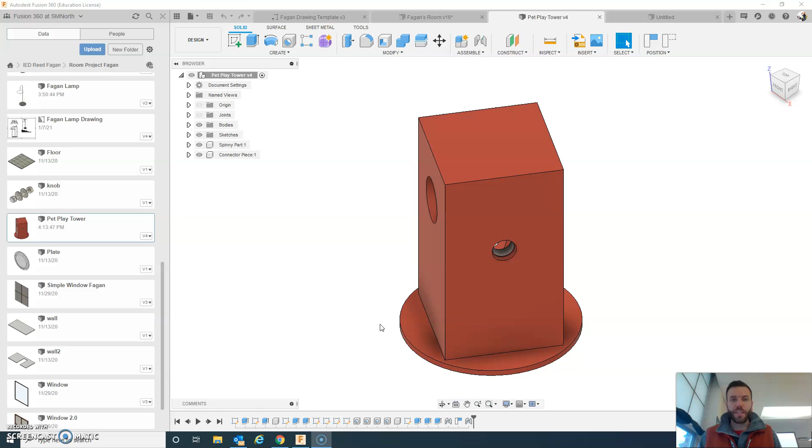Alright, I'm really excited about this assignment for the room project, because in the end you're going to create something like this, a pet play tower. Think of those things they make for cats where they can jump into them, except you're going to choose your pet, right? So it could be a ferret, a cat, a bird, it could be a wolverine. I don't know what lives in your house or what you want to live in your house.

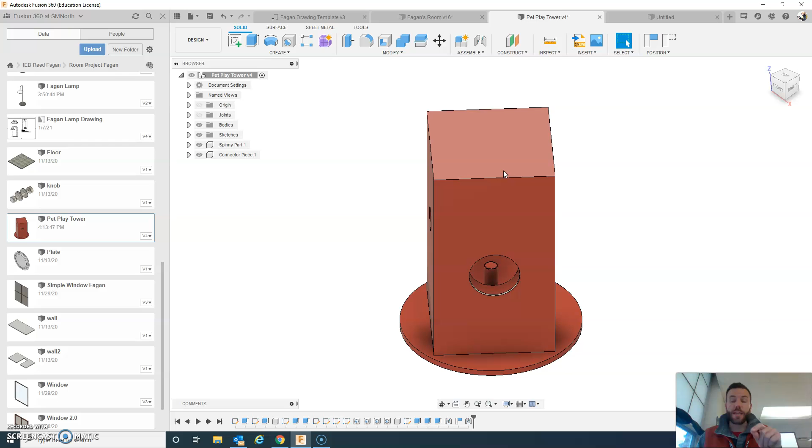But you're going to do something additional. You're going to make some design safety choices. Whatever you choose as your pet, you're going to design your pet play tower to be specific for that animal. So you need to make sure the holes are big enough, maybe. Maybe you're worried it's going to tip over, so you make a change to make the material heavier so it doesn't tip over when the animal jumps in. Also, the inside right now, you'll see the design I'm going to show you has this kind of spike. What could you do about that?

So there's different things you can choose from. You're going to have to make at least one decision and change to make it more safe for your animal. So let's get into this here.

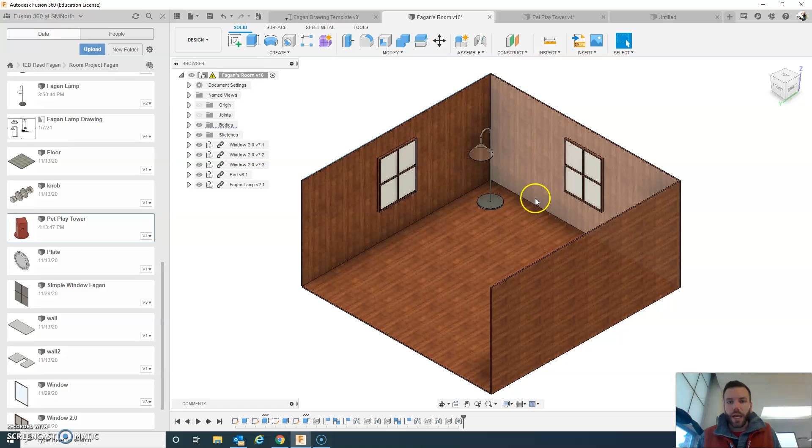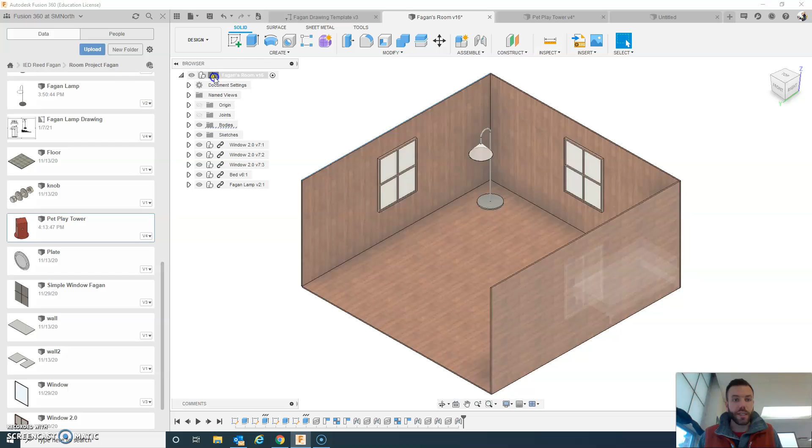One thing I want to show while I'm at it is you should be paying attention to this part of your screen in Fusion, because if you make changes to files that are inside a file, components that are inside a larger component or assembly, occasionally you'll get this indicator and you'll see something like this. What you'll need to do is sometimes you can just click on it and it'll update. Other times you should just close it and then reopen it and it'll reflect those changes.

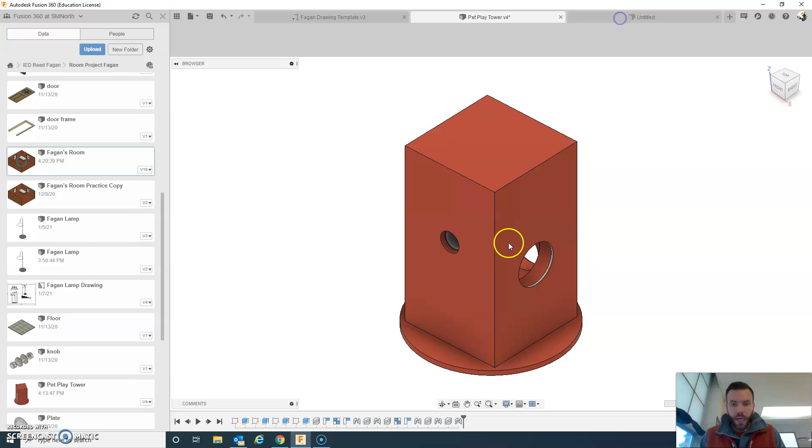So let's get into the nitty gritty here of how we're going to make this pet play tower. I was hoping that would open. There we go. But there are three components for it.

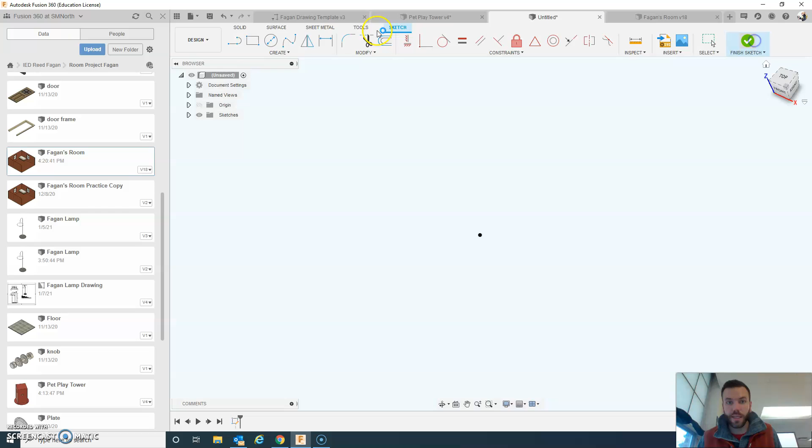So the first thing you'll want to do is create a cylinder for the base. This is, I think, 30 inches across. And finishing the sketch, we're going to extrude this to be 1 inch up.

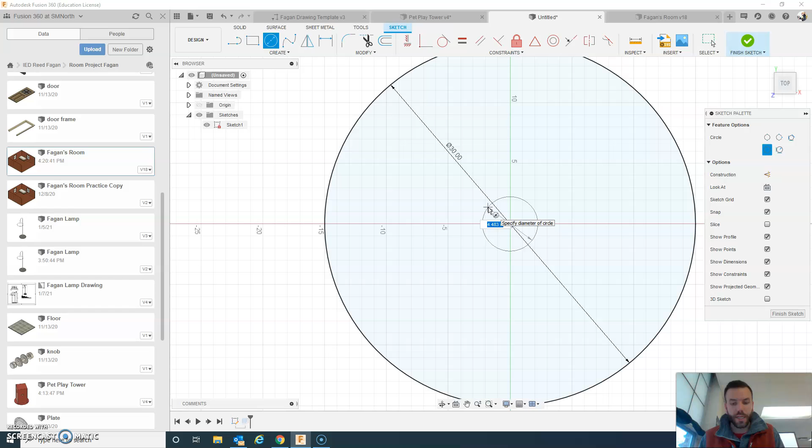So then from there, I'm going to go back and edit this sketch. I'm going to add a center point for it to spin on, to allow the thing to spin on it. So I'll finish the sketch. What I can do is turn the visibility on, go underneath, and we're going to extrude this up a distance of 12 inches.

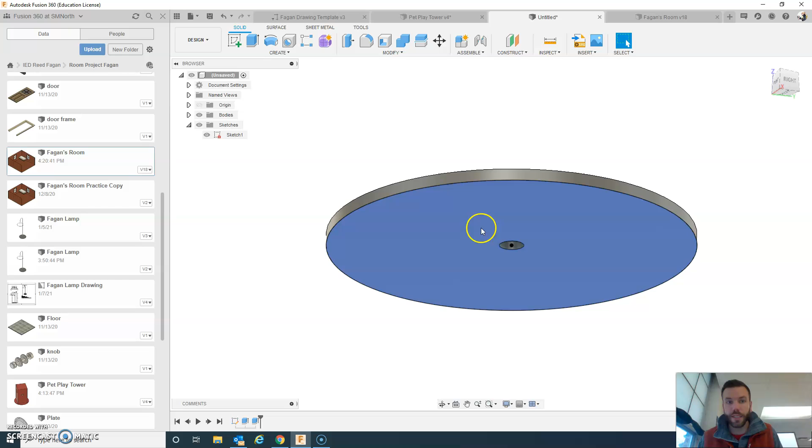Oh, it did an extrude cut, so we'll just fix that. Right click, edit feature, change that cut to join. And so we got that part.

And we're going to save this thing and call it Fagan, so your last name, pet play tower or structure. So for now, that's what you're going to do. I've already got one, so I'm not going to do that right now.

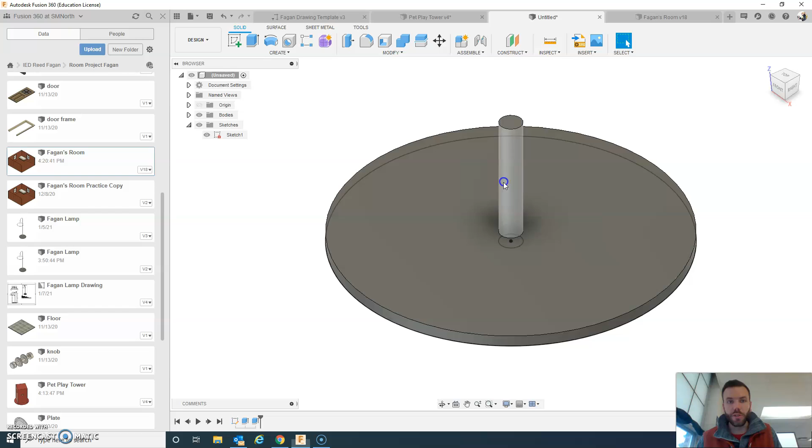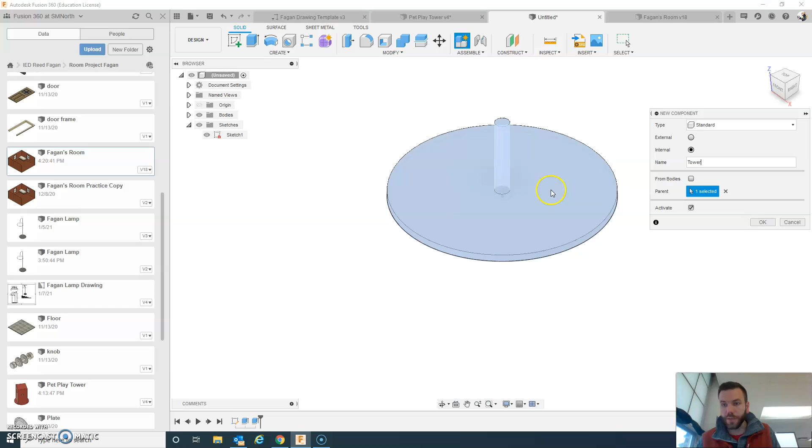But then you'll need to make another component. New component, and we want this to be internal. It's standard. The name of this will be the tower itself. And from bodies, we can leave that alone. We want it from this parent, and we're going to say activate as soon as we go. So click OK, that means it's activated. This is grayed out, that's as it's supposed to be right now.

So now we're going to create another sketch to get started on that component. I'm going to pick the same plane as earlier. And if I'm worried that I'm not picking the right plane, I can just go here and make sure that I've got it. YZ, XZ, XY. I believe XY is what I want there.

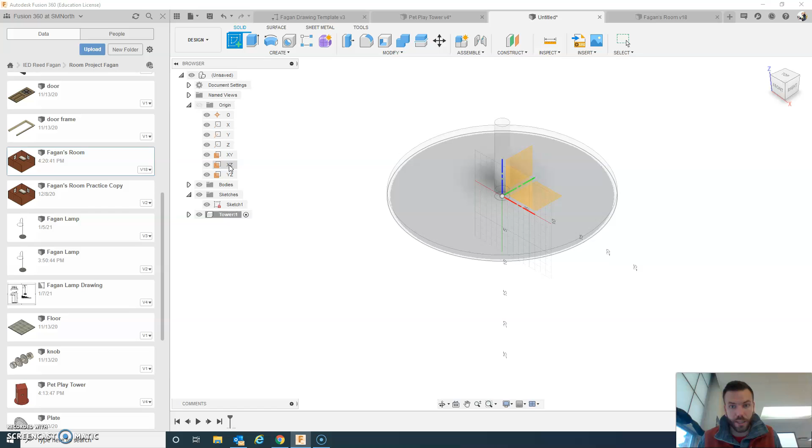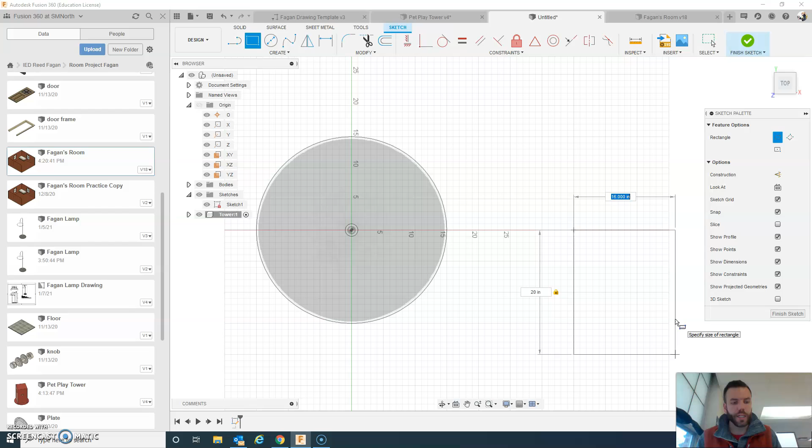Yeah, so I'm going to come over here, and this is going to be my tower part. So I'll make a rectangle, and I want to give it some space here. So I decided a good size for this, I believe, was maybe 20 by 20. Let me check that. Yes, that is correct, 20 by 20. So I've got it here. It's a little close for me, but that's fine.

So what I'm going to do after that is use this offset feature to make another kind of square, and I'm going to offset it by 3 inches. So that means the walls of this thing in the end are going to be 3 inches thick, basically. So I'm going to finish this sketch.

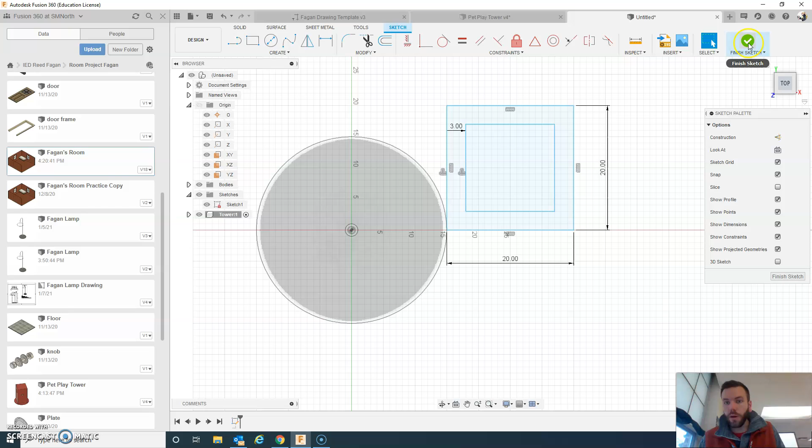And go at an angle. I always do that when I do something three-dimensional. There we go, that's a little nicer.

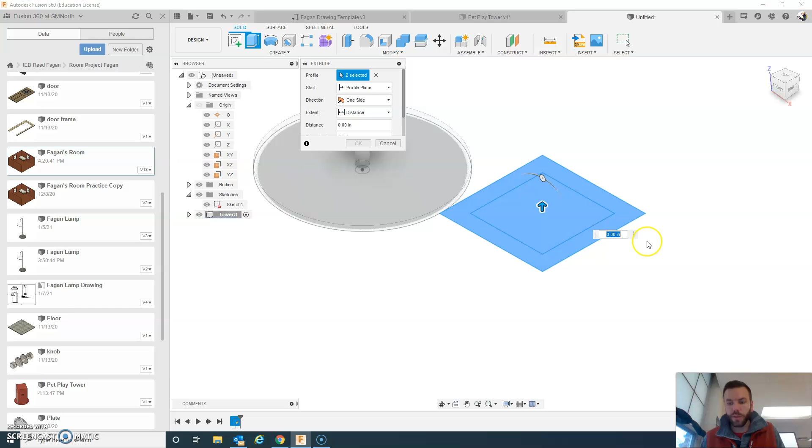So we're gonna extrude this up, and we're gonna pick both of these to start with, all right? And you'll see why. And we're gonna say we want to extrude them up 36 inches, okay? So enter.

And now we're gonna go back, find the sketch we started with, turn the visibility on, and we're gonna extrude cut that up into here a distance of 33 inches, all right, so to maintain that 3-inch wall all the way around.

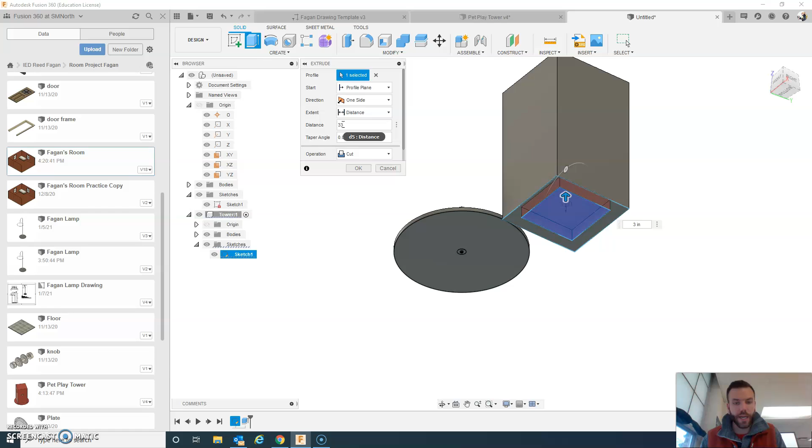All right, so there we go. We've got our tower, all right. So let's turn the visibility off for now.

So now we need to add the holes. Okay, so to do that, I'm just going to create a sketch on each side, and I'm going to place a point on each sketch, and that's all that sketch will have. So I'm just going to drop a point here, say OK, and use the dimensioning tool.

And let's start the first one. Well, they're all going to be 10 inches from the sides, right? Because it'll be right in the middle. But we're going to start the first one, how about 10 inches down from the top?

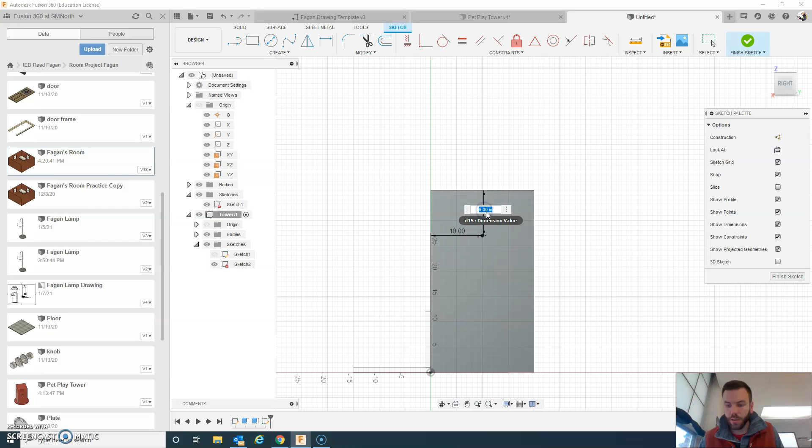Okay, so finish sketch. And you might think, well, what's the point of that? That's a waste. Well, you'll see. Okay, these are where we're going to build our holes around.

So let's create another sketch on this wall now. Same thing, create point, just place it somewhere on here, right click, say okay, then dimension.

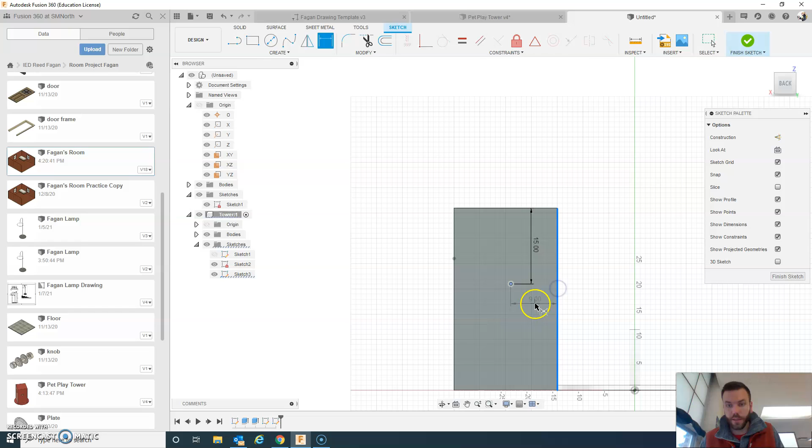All right, and this time it's going to be 15 inches down, and it will be 10 inches from the side. All right, to finish that sketch, we're going to revolve again around here.

Create another point. Dimension it.

And then the last couple steps I'll have you do on your own, right? Oh, that is not right. So what you're going to need to do is put this point 20 inches down from the top, and then the last one 25 inches down.

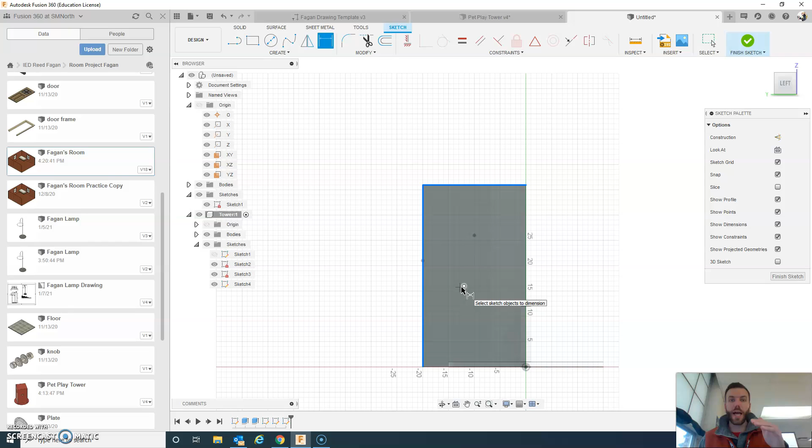Okay, so you'll see I've got those holes all the way around here, and you can kind of see through the object to see those holes. Or sorry, not holes, work points.

So now we're going to create holes from them. So we can go to this hole feature here, and you just select the point you want to start with, and then you create the hole.

Okay, so here's where you need to decide what kind of animal are you going to create your thing for. All right, so for mine, I basically say it's a cat. All right, so you may need to look up roughly how large that animal is.

Okay, and so based off the research I was looking at, my rather small cat could fit into 8-inch holes. Although, did you see, I actually changed the wrong thing here, didn't I? You got to be careful on here.

What is representing what? So that is the depth. All right, I want the depth to just be 3 inches so that it goes through that wall and no farther, all right. I don't want to go all the way through the other wall. And then this is how big across this thing is.

So I'm going to change that to be 8, all right.

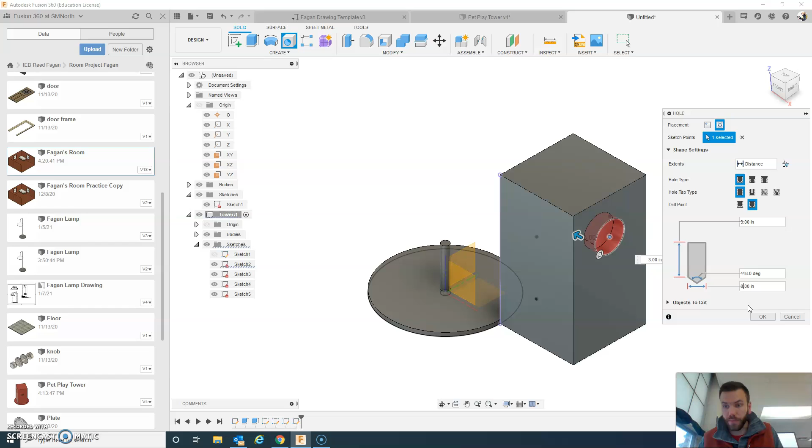So the first hole is pretty simple, all right. We would call this like a simple hole. Literally, that's what that is called. But I want you to use at least 3 different hole types, okay?

So for this next one, I might make it a counter bore, okay? And there's different choices on here. I could, let's see, make it tapped, all right? That'd be kind of cool.

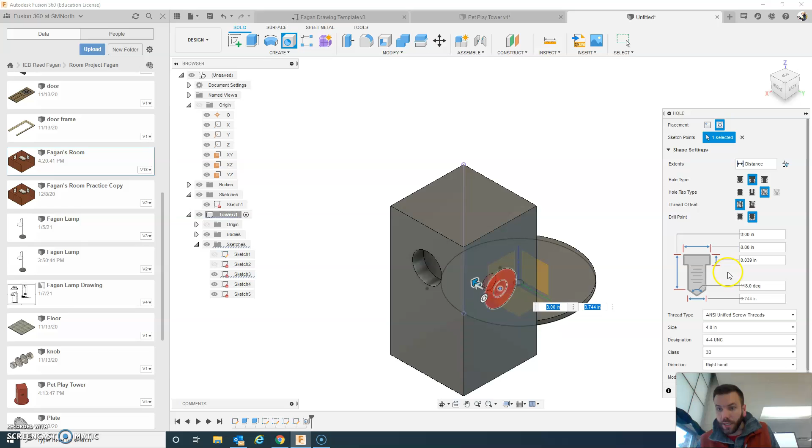And let's see, we're gonna make it, yeah, at least 3 inches deep, so that's good. And in fact, if I bring it, well, yeah, that'll be good. We will make the top part, sure, 8.8 inches across, so a little larger. And this bottom part, we want to be as large as possible.

It looks like they don't have an 8-inch option, so 4 is going to be our largest there. What if I choose a different one? What if I go the Acme screw threads? I think we might have a 5. Okay, awesome, so we do have a 5 choice there.

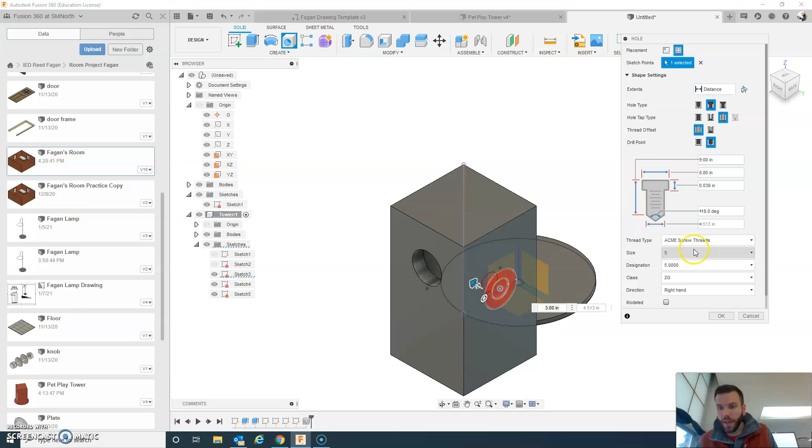All right, and then I'll say okay. All right, and so now I've got this really kind of interesting hole here. All right, maybe I want to change how that looks a little bit.

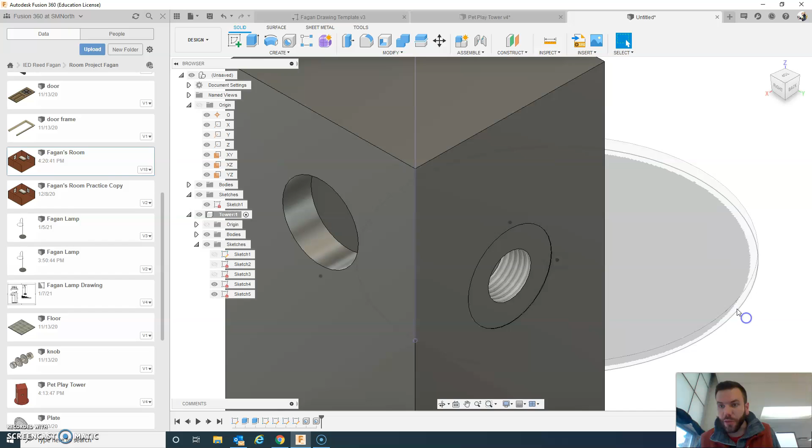So I go edit feature, and we make this go a full inch in. All right, say... sorry, not that, let me do cancel. Edit feature. Yeah, you got to look really closely at what you're doing. I wanted this to be an inch deep. There we go.

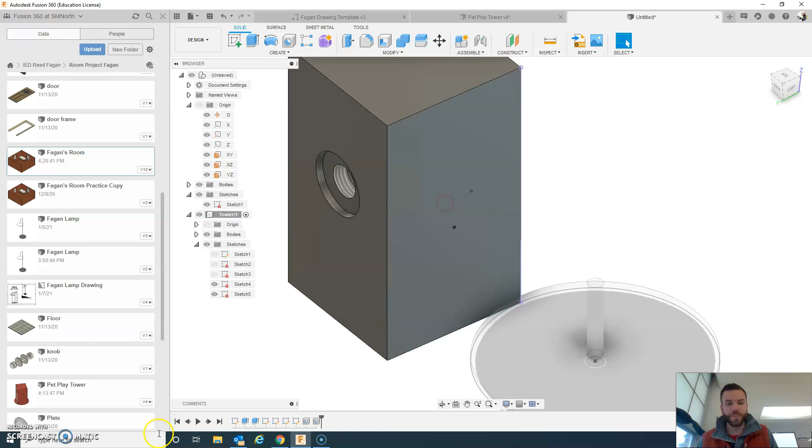All right, so then you're going to make your last 2 holes. I'm going to pause here and let you guys figure that out on your own. Don't forget your animal, making those holes as large as you can for that animal.

Now you can see I have at least 3 different types of holes. The first 2 here are the simple ones, all right? But the third type of hole there is a counter bore, and then I've got a type of countersink here, all right? So there you go.

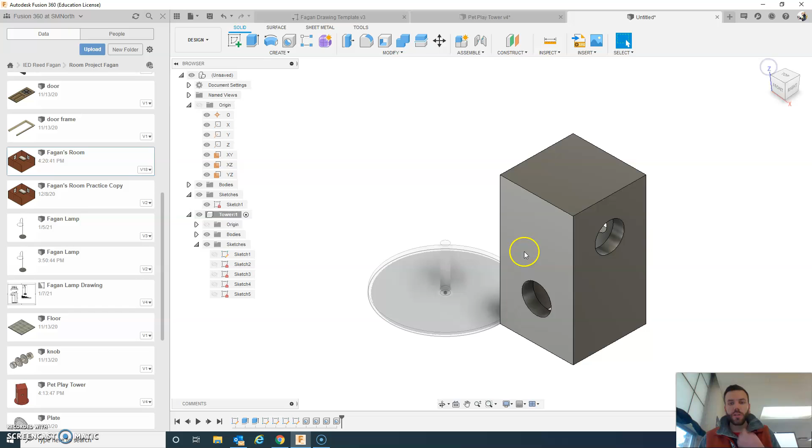Once you have your 3 different types of holes, we need to make it so these will fit together, all right? So we're going to create one more component, and we'll call this the connector piece. How about that?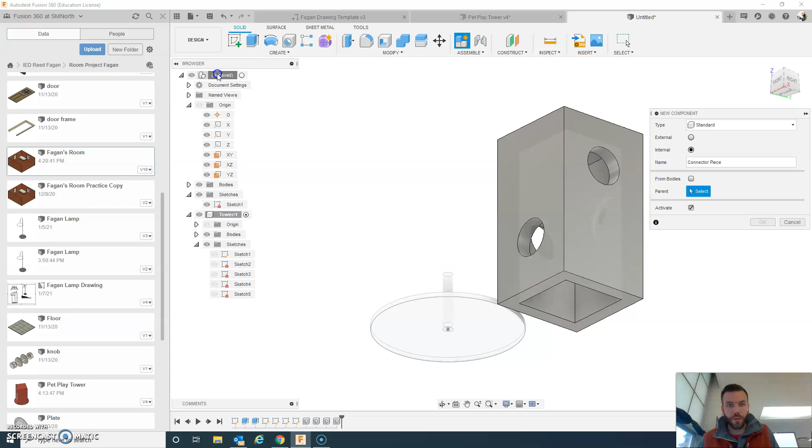All right, the other things are fine on here. It's an internal, although I will change the parent. I'd like for this to be the parent. All right, you'll see that actually highlighted the other thing as well, so that's better. Let me say OK. All right, and so now it's time to draw it.

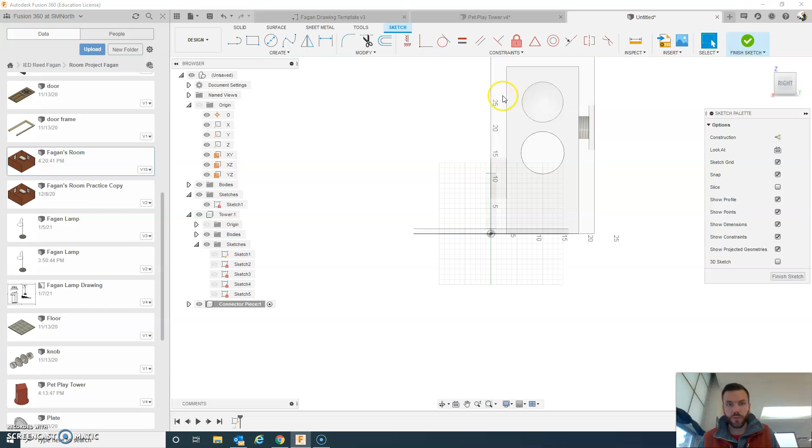So let's go to Create Sketch, and again, I want it to be on that YZ plane. Oh, apparently not the YZ plane. Let's back out of that, undo. Create sketch, let's see, I'm going to check which plane it was. Okay, yeah, it was the XY plane.

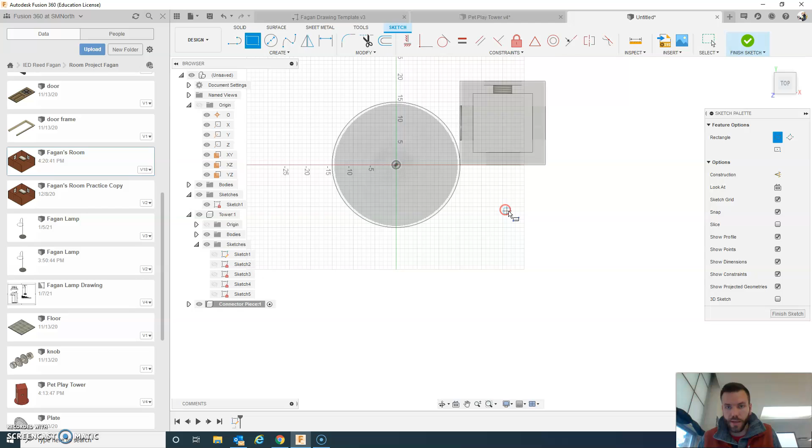So now that I found it, I'm going to go to top. I'm going to rotate it just for my own purposes. And we need to make this connector piece. So the connector piece is going to be 14 by 14, right? So that's the dimensions of the inside of this tower we made. Okay, we are going to extrude it 1 inch.

So let's do finish sketch, and we'll go here, let's do extrude 1 inch. And we need to put a piece that's going to fit around that so this thing can rotate.

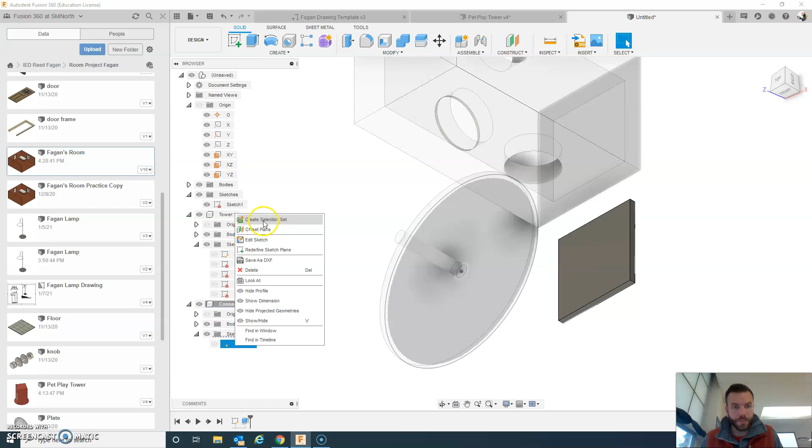All right, so let's edit our sketch again. So go here and let's say edit sketch. And we want to put a circle that's going to be in the middle. All right, so we can make sure it's in the middle by using those little triangles there. So that's showing me from there it's in the middle. Then I want to do from this side as well, okay? And so now I've got it.

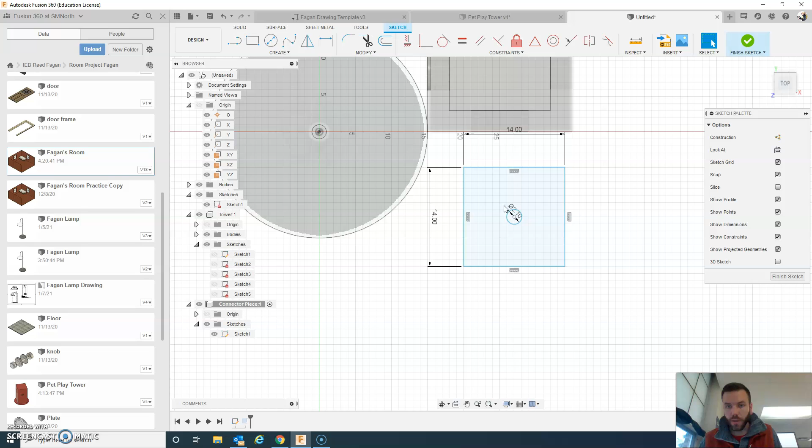There it is. It's going to be constrained 2.1 inches, all right? And then very important, we're actually going to also make one that's 2.2, all right? I could have done the offset tool, but I'm going to do it this way, 2.2. All right, so let's go to finish sketch.

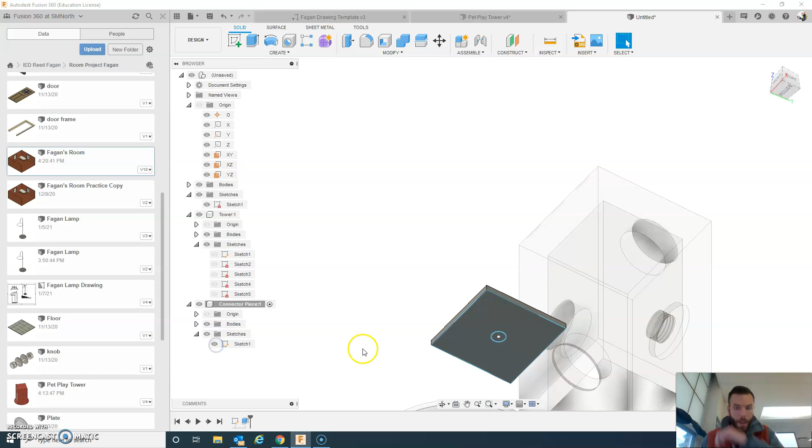And we're going to go back to the home view. Whenever you get confused, just go to the home view. Let's turn that sketch on. And we are going to extrude first of all both of these up. It's kind of like we did with the tower.

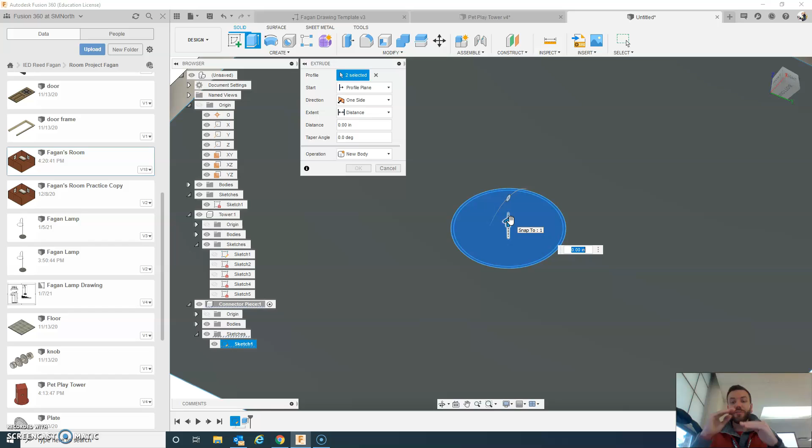And I think we made our little guy over there 12 inches, and of course that was from the very bottom. So we need this to be 11 inches, okay, because it's going to sit on top of that bottom. So we're going to say 11 inches up.

All right, of course it did cut. No worries, we can right click and say edit feature, change that to join. All right, so now we can look at it.

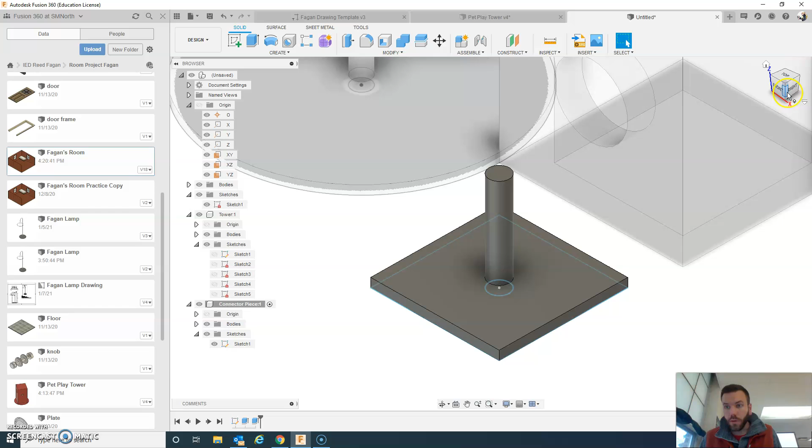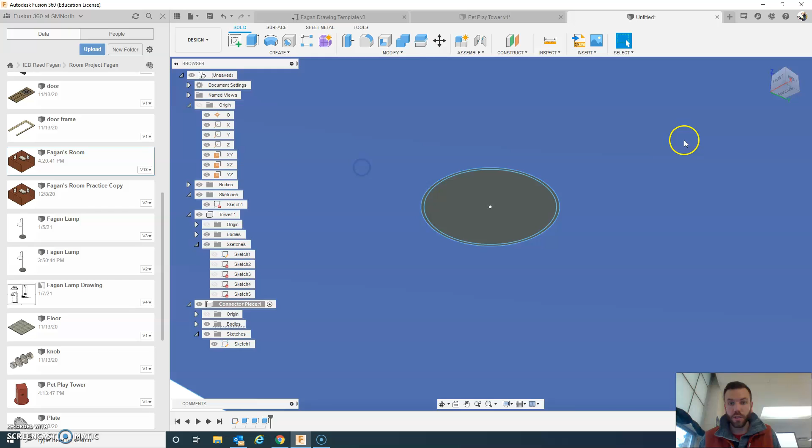And now we're going to go in and we are going to do one more extrude cut on that smaller circle. All right, I still got the sketch visible, so that's nice. So I'm just going to pick that and I'm going to push this the right direction. And then I'm going to say 10.9, apparently it's negative, that's fine, to leave that same 0.1 inch top on there.

All right, so let's check it out, check it from the bottom. All right, looking good. Sometimes when you turn the sketch off, it's a little easier to see. Oh, maybe that did not do what I needed it to do. Let me try to fix that. Okay, I must have messed something up. So now it's fixed, you can see, and it looks good on both sides.

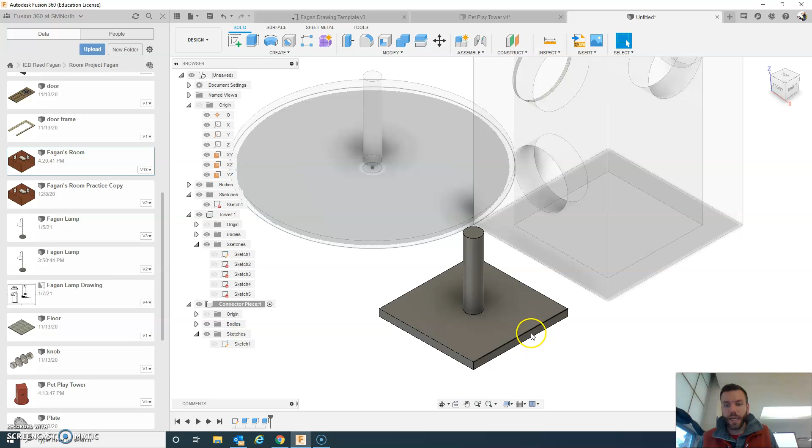So I'm going to have to talk you very quickly through the last few steps. So you will want to join the inside of this to the inside of that. Okay, you hit the J key to do that, all right? And make sure you're getting the right thing, connect to the right thing.

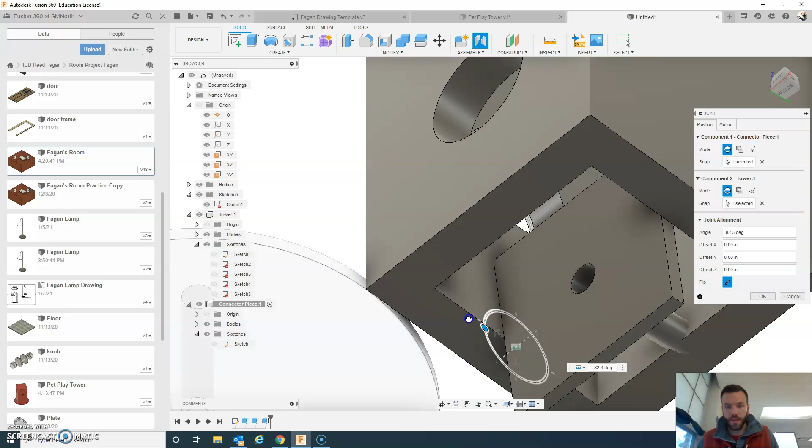So just click this wall, click like that, and then rotate underneath, and we'll say let's do this wall and that point, all right? And then you can, if you need to, spin this around, all right? So 180 degrees. After that, oh it looks like it's not quite lined up.

That's fine, I can bump it up an inch. You will do a revolute joint for this part onto there, and then you'll place the whole thing in the room. Have fun.